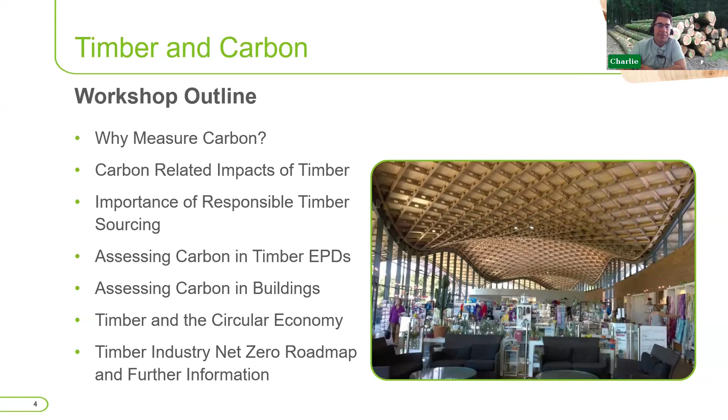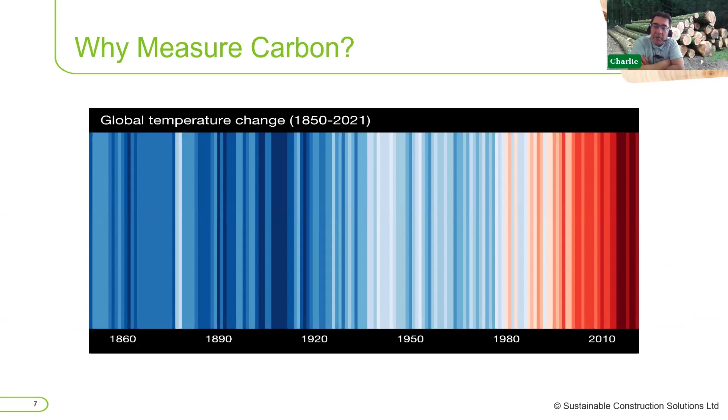So why do we need to measure carbon? I think hopefully we all agree we're in a climate emergency at the moment. Some of the hottest years on record have occurred in the last 10 years or so. And we're currently on course for a minimum 3 degree temperature rise by the end of the century. And considering that we set targets in Paris in 2015 to try and keep well below 2 degrees, preferably at 1.5 degrees compared with pre-industrial levels, we're not doing too well on that. And actually, last year we breached that 1.5 degrees Celsius average temperature.

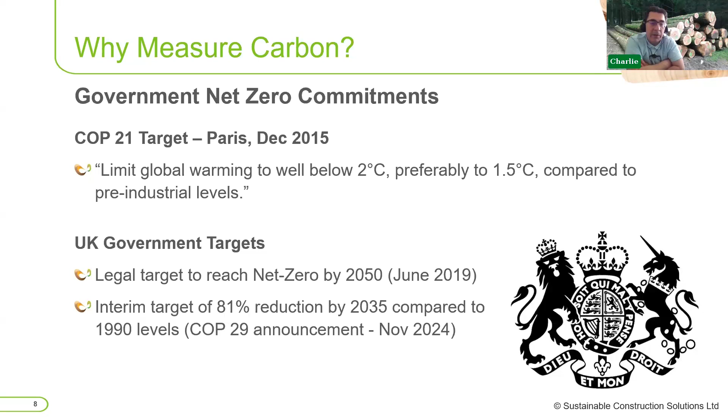Alongside that, so that's the international targets, and obviously we know there's lots of upheaval in the international world at the moment, but the UK government still has its net zero target of 2050, which was set in June 2019, and there's now an interim target which was announced at COP29 last November, where they're looking to make an 81% reduction by 2035 compared with the 1990 levels. So the UK is doing pretty well, and it shows that it can be done. And we can see big reductions in CO2 emissions if we do get the right policies in place.

A key document that was issued earlier on this month is the Timber in Construction Roadmap. The word from the minister there: this roadmap supports the government's ambitions for a circular economy and a sustainable low carbon future. And obviously they recognise that the built environment accounts for around 25% of the UK's carbon emissions. So by increasing the use of timber, which obviously sequesters carbon, we can significantly reduce these emissions to achieve their net zero goals by 2050 while stimulating the UK economy. So that's what the government is saying around it.

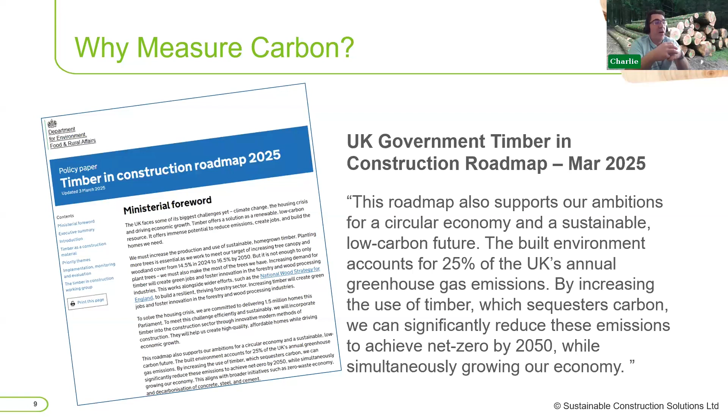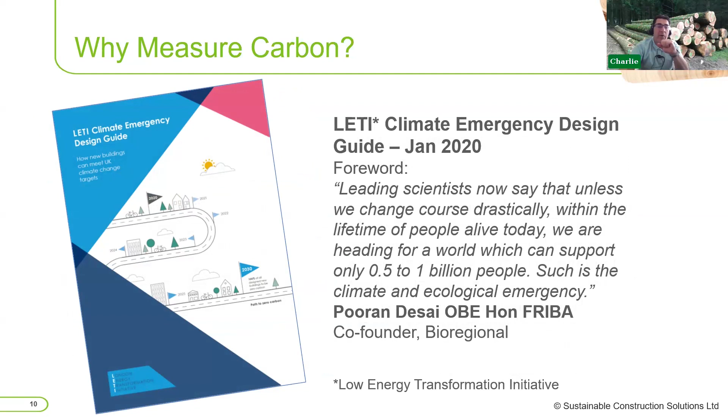But obviously, to be able to confirm that we're doing that, we need to be able to measure carbon as well. People like LETI have been pushing this for a long time. So their climate emergency design guide has targets in it on what we should be pushing for. And obviously the Climate Change Committee, one of their progress reports basically says we need to develop plans to rapidly scale up levels of wood used in construction and support the assessment and benchmarking of whole life carbon in buildings. So that's what the Climate Change Committee is recommending the government should do.

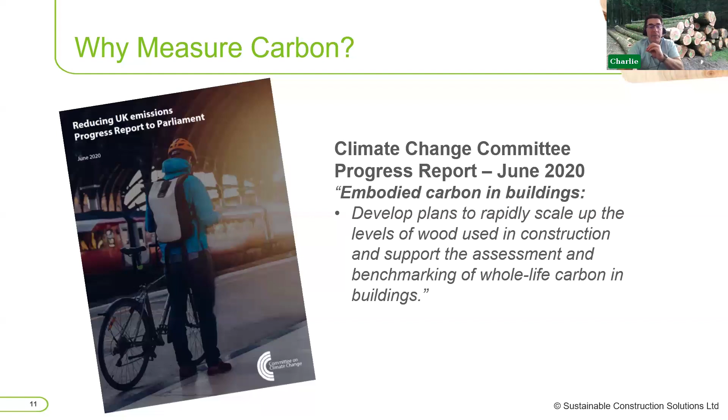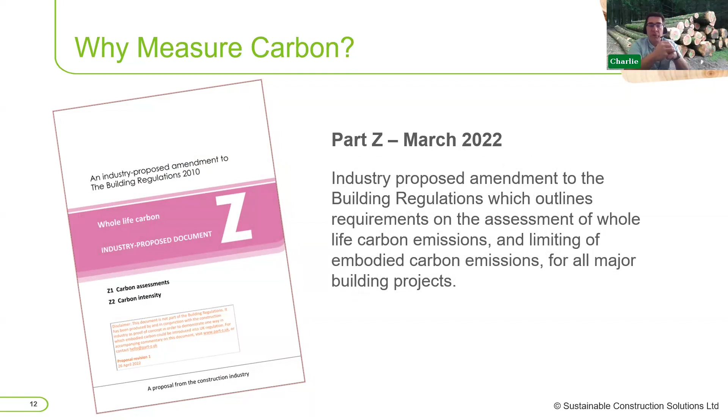The industry agrees, and the industry has proposed this Part Z amendment to the building regulations. This isn't actually a building regulation at the moment. This is a mock-up developed by the industry, which outlines how the requirements on assessment of whole life carbon emissions in buildings could work, along with limits on the embodied carbon based on amount of carbon per square metre of floor area. So everything is pushing towards us measuring carbon in buildings and construction going forward.

How does that impact on timber? Don't want to teach you to suck eggs, but going back to our old biology lessons back in high school, obviously trees take CO2 out of the atmosphere. They absorb the carbon and emit the oxygen back into the atmosphere.

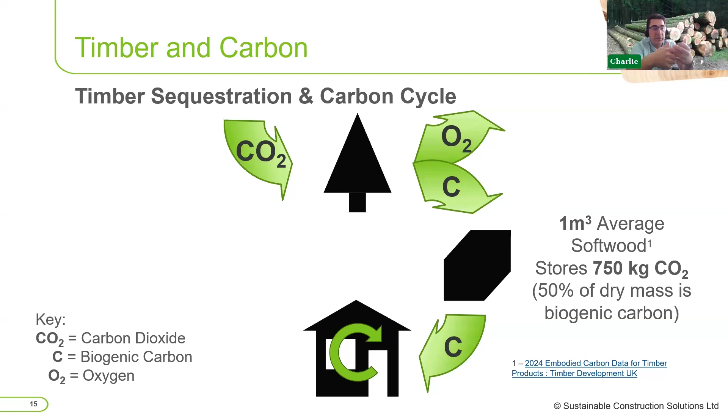But obviously that carbon as well, that's a physical carbon that stays locked up in that timber, no matter how many times that piece of timber is used or recycled. That carbon stays locked in the fibres of that timber. So as long as we can use that timber in construction for a long amount of time, recycle it, reuse it an infinite number of times, the only way it can be released back into the atmosphere is if it decomposes or we burn it.

And a lot of the waste timber we use is burnt, but obviously that's balancing the carbon emissions from when it first came out. So in effect, you get a carbon balance across the life cycle. But over that period in between, it could be a couple of 100 years, could be 300 years. If it's the door in Westminster Abbey, it's 1,000 years. That carbon is being stored.

However, going forward, it's likely we're going to have some form of carbon capture and storage. And then we can not emit that carbon when we burn it at the end of the day. So that becomes very much a carbon removal mechanism going forward.

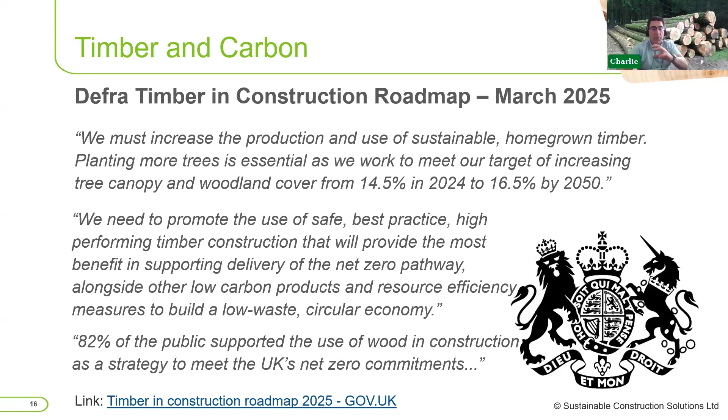So just looking at some more issues around timber, and this is some more stuff from the roadmap where the government is saying, look, it understands this, and we need to improve and increase the amount of homegrown timber that we're using, and we want to increase the canopy cover from 14.5% to 16.5% by 2050, and we also need to promote low carbon timber and support timber in construction going forward.

And the reason for that is obviously that it's not just the timber in construction that's storing carbon, it's the actual forests themselves. So this is from the Forest Europe report, shows that in Europe, we've got about 227 million hectares. It's around 35% of the total land area. And that is storing in the forests and the soils about 135 billion tons of CO2, with a net uptake currently estimated at around 570 million tonnes per year being taken out the atmosphere by those forests.

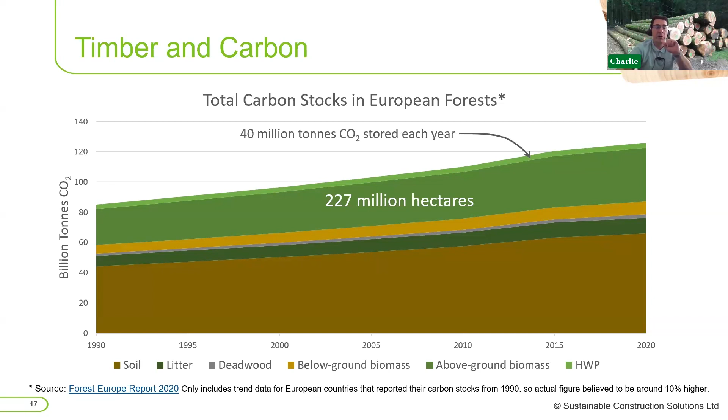So a lot of biomass being there, and 40 million tonnes of that being stored is actually in the built environment. So that's what we call harvested wood products, generally used in buildings and construction. If we look at that for the UK, we can see obviously we've got a lot lower forest cover in the UK. It's only about 13% overall.

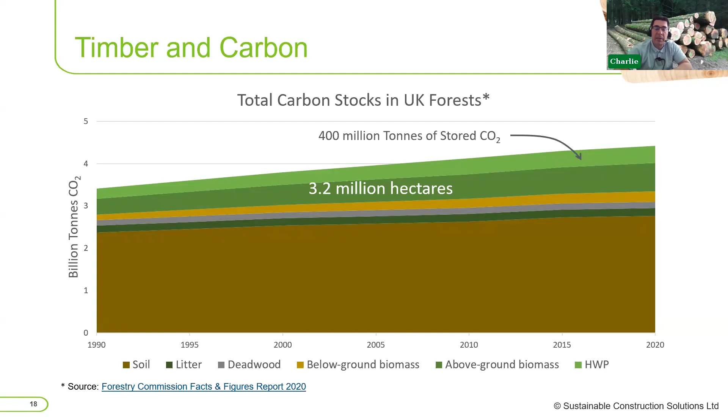If you look at that green line at the top, that's the harvested wood products. Because we're importing a lot of timber into the UK, the harvested wood products makes up a lot larger percentage of the stored carbon in the UK. So it's about 4.2 billion tonnes being stored overall in woodlands, at around 20 million tonnes per year take up, with a significant around 400 million tonnes being stored in those harvested wood products.

So as far as how we measure that carbon, there's two key documents that we need to look at for construction products. EN 15804 is the core rules for product category rules for construction products, and that's really around the environmental product declarations that are produced for individual products. And then you've got BS EN 15978, which is the sustainability of construction works, the assessment of environmental performance of the building. So that's taking the information from the EPD for the product and then multiplying that up for the works in the building.

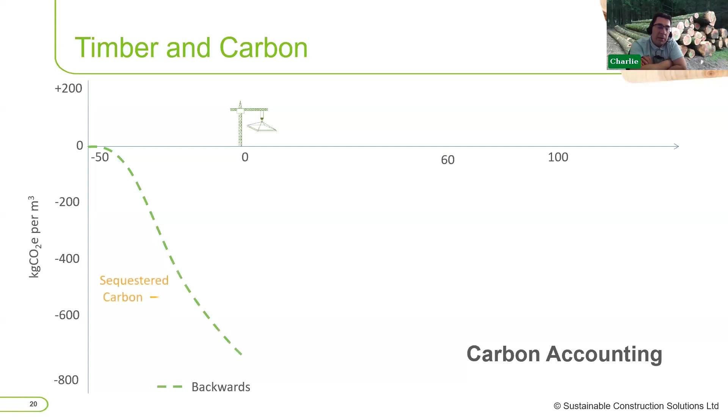The standard itself is quite basic. So what the RICS have done is produce their whole life carbon standard, so whole life carbon assessment of the built environment. That's now in its second edition, which basically gives a lot more guidance on how you can do that for a building. And in effect, the way it works, if we take this graph for timber accounting, it takes what we call the backward approach, and to try and explain how this works.

So we've obviously got our timber growing in the forest 50 years before it's harvested and used as timber. So over that time, it's taking carbon out of the atmosphere. So that's the 750 kilograms of CO2 that we talked about. So that's the line coming down here. Obviously, when it's felled and processed, there's a carbon impact of that. But overall, there's a net negative figure of carbon held out of the atmosphere.

There is another school of thought which talks about using the upfront carbon, which does cause a few issues because there is a missing carbon gap. So it's not something we promote, taking the upfront carbon and discounting it over a number of years. It just doesn't really work.

And the standards agree with us, actually, because if you look at the way the standards work, they do take that up front. So when you do your assessment for your building, you take the biogenic carbon into account when you're doing a whole life carbon assessment at the point of construction. Obviously, there's an upfront impact there.

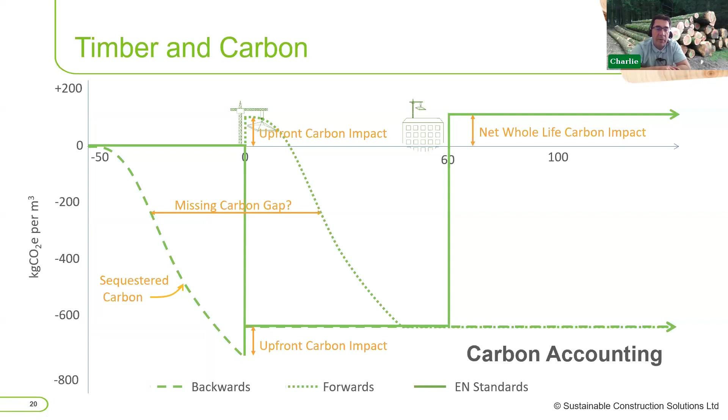What the standards do say, though, is you must work out that whole life carbon assessment over a 60-year period. So you end up having to add back in that biogenic carbon after a nominal 60-year period. Obviously, the building may stand for a lot longer than that, but you have to account for it over a nominal 60-year period. So you end up with a net positive whole life carbon impact figure, which is the true impact of the processing of the timber, which is fine.

But in that intervening period, obviously you're storing that carbon out of the atmosphere. So it can't actually do any damage to the planet at that time. And obviously, if that building stays up, that carbon is stored for a lot longer than that. It's not just 60 years. If you can keep that building in place, that carbon is stored for a lot longer.

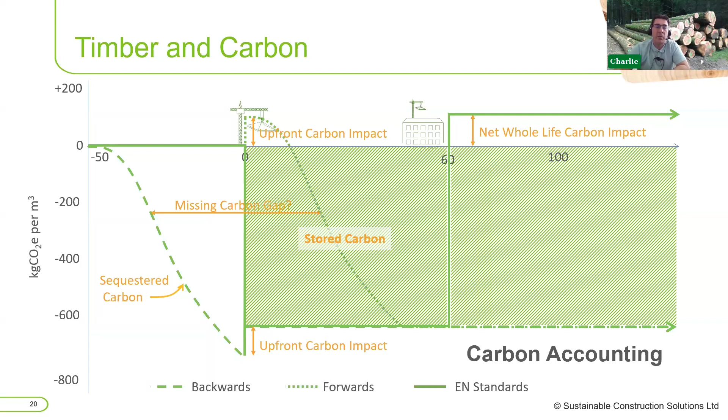So why is it important that we use responsibly sourced timber within these carbon assessments? Well, the standard basically says why. It says, in the 15804 definition of sustainably managed forests, you can only include timber in the upfront assessment, in the A1 of the assessment, if you're obtaining timber from sustainably managed forests.

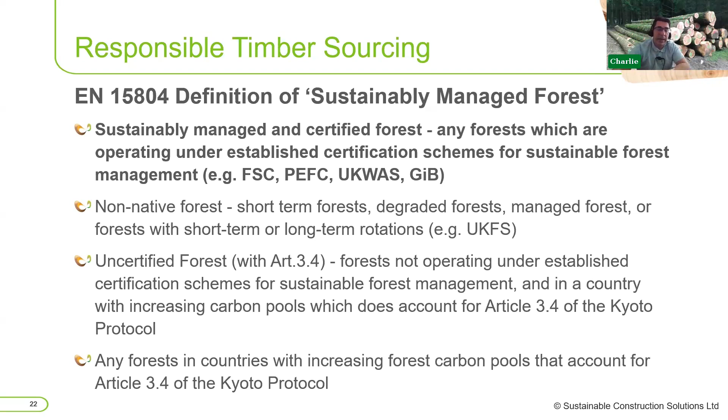So, for example, sustainably managed and certified forests, any forests operating under an established certification scheme for sustainable forest management, such as PEFC, obviously here today, but also FSC, UK Woodland Assurance Standard, Grown in Britain, for example, would all come under those definitions. You've then got some other options of possible forests which might be able to be included, but there's a lot more work to do to demonstrate that.

And obviously, the reason for that is we are seeing a lot of deforestation still around the world. It's better than it was back in the 1990s. If you look at that graph there from the UN Food and Agriculture Organization, at one time we were losing about 7.8 million hectares a year. It's now slowed, but we're still losing 4.7 million hectares of net forest a year from the world's surface. So we do need to reverse that trend very soon, really.

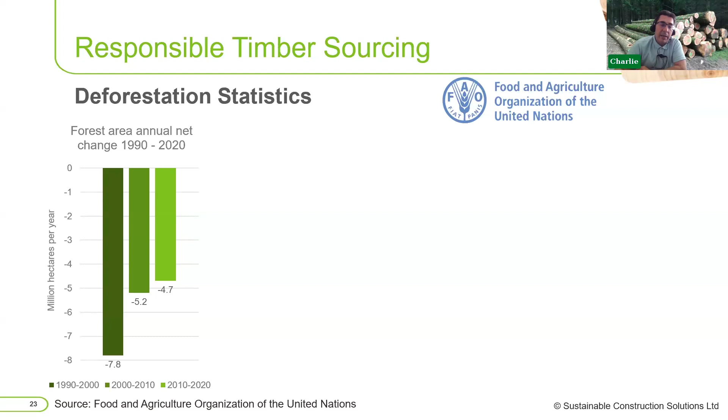So based on that, what are we actually buying in the UK? What timber do we buy? The latest information from the Forestry Commission Statistics Report that comes out in September each year, so this one's from September 2024, shows the data for the previous year, and TDUK import data as well shows that the vast majority of the wood we use is softwood based. That's coming from generally fairly local areas, mostly from Europe, Scandinavia in particular.

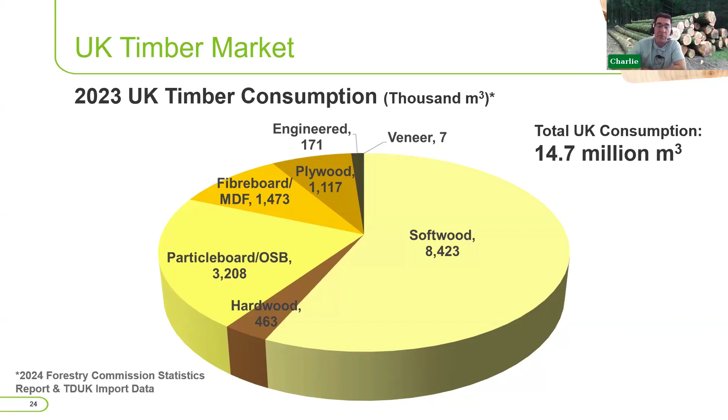Launch this one. How much of the UK consumption, that 14.7 million cubic meters, do you think is sourced from the UK? So most of you think around 20%, which, to be fair, if you were talking about structural timber, that's not far off actually. We estimate that around 80% of structural timber is sourced from overseas, and only 20% from the UK. But actually, when you take into account all the other timber uses such as fencing and pallets, it's actually around 37 to 39%, depending on the year.

So almost 2/5 of the timber we use in the UK is actually homegrown, which some people are surprised by. So that's where we are with that. If I do a little breakdown here of where stuff does come from, you'll see that UK amount there, about 5.5 million cubic meters based on the 2023 results. The vast majority of the remainder coming in from the EU, places like Scandinavia mainly, and in particular Sweden, about half of our softwood imports coming from Sweden.

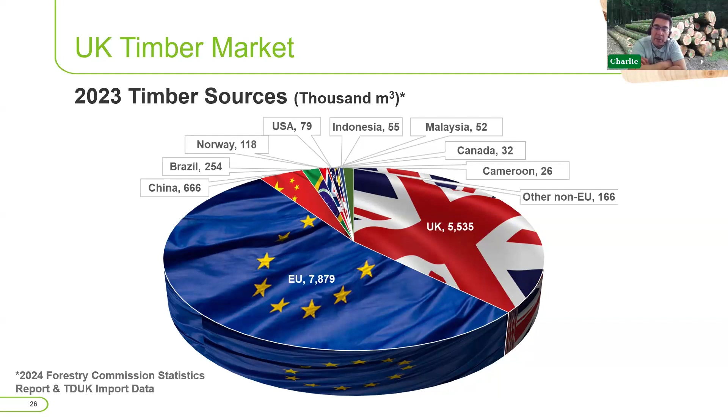But you have then got some imports coming in from some of those higher risk nations, so China, Brazil, Indonesia, Malaysia, Cameroon, which would be classed as higher risk in a lot of cases, particularly Brazil, because of the deforestation there. So when we're sourcing from those countries, we absolutely need to make sure that it's responsibly sourced timber coming in, preferably PEFC.

And that is very much like a crop. It's a 35, 40-year crop, but it is a crop in the same way as we plant wheat for our food and bread. We plant trees for our construction timber. It's just a much longer life cycle, but that's how we've got to think of it, as a crop.

Slightly different methods for hardwood. This is a typical picture from a Malaysian forest, where we'd do selective felling, where we only take out the amount of timber that forest can regenerate in a period. So in any one year, a forest might put on 100 cubic meters of timber. So in that year, in that area of forest, we can only take out 100 cubic meters of timber. So you maintain that balance in the forest.

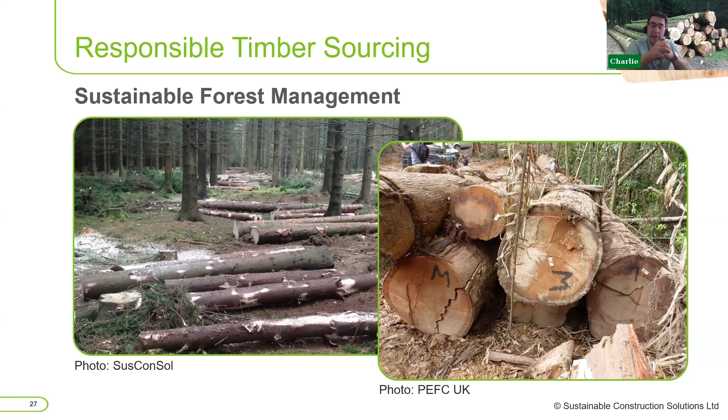That's backed up by the government's responsible timber sourcing policy, the TPP, timber procurement policy. That requires that only timber and wood-derived products originating from independently verifiable, legal and sustainable sources, which can include FLEGT partner products, will be demanded for use on the government estate.

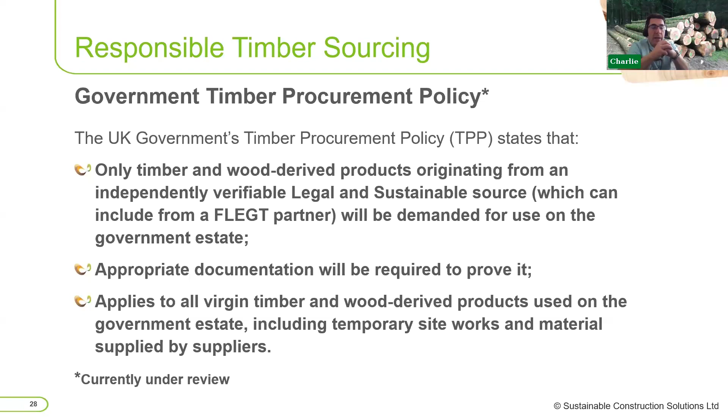They will demand appropriate documentation to prove that, and it applies to all virgin timber and wood-derived products used on the government estate, including temporary site works, hoardings, formwork, protection, etc., and all the materials supplied by suppliers and subcontractors, not just the principal contractor.

There are two ways of demonstrating that. There's what we call category A evidence, which is independent forest certification schemes, and the two that are noted in the scheme at the moment are PEFC, obviously, and FSC. It's likely that Grown in Britain will get added to that in the next iteration. They've been talking about doing an update for the last 5 years, but we do feel that that's going to be very close now.

Grown in Britain demonstrate that timbers come from a UK forestry standard source, which is category B evidence at the moment. But you've also got your FLEGT stuff, which sort of sits in between A and B, but I've stuck it in B there for now. And if you can't demonstrate that, then you have to comply with the framework for evaluating category B evidence, which is quite an onerous task. You do not want to be doing that if you can help it, because that is a hell of a lot of work. So best to go for one of those certification schemes.

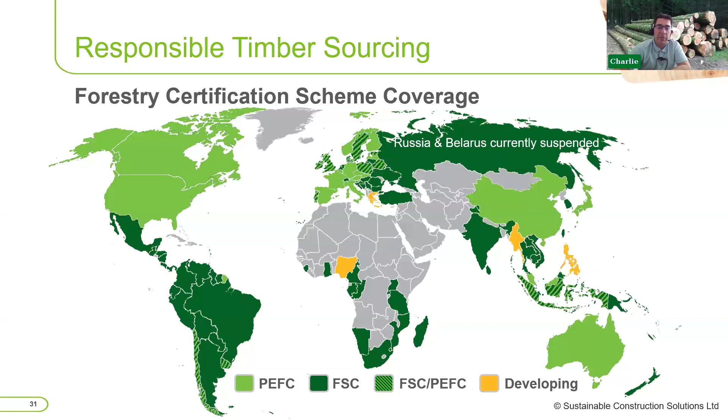And when we said that most of our timber is coming from Europe and Scandinavia, it makes sense that we should make sure that we allow that PEFC timber, with FSC very much dominating the higher risk areas. So places like Brazil, Sub-Saharan Africa, obviously Russia and Belarus, which are currently suspended; we can't get any timber from there at the moment. Also parts of the Far East. So just bear in mind where you're getting your timber from; you need to include all of those schemes to get the best opportunity to get certified timber.

So assessing carbon in timber EPDs. How do we assess the carbon in an EPD? We'll spend the next half an hour going through that. There's a number of stages within an EPD. We've got the raw material extraction, transporting that from the raw material site to the manufacturing site, and the manufacturing process itself. That's termed A1, A2, and A3, what we call the product stage.

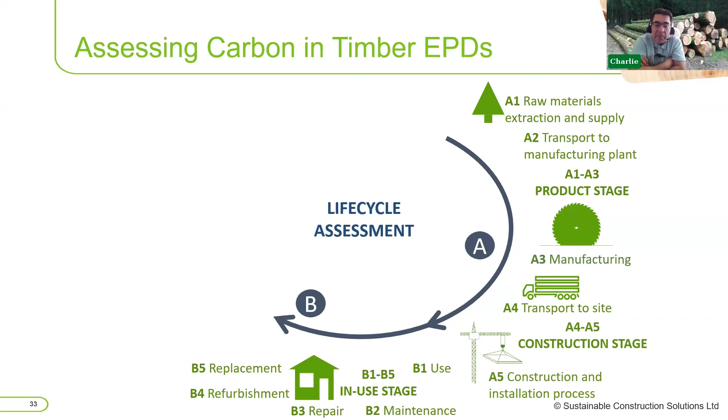We then have the construction stage, which is transporting that material to the site of use and putting it in place on the construction site. We then have the in-use phase, B1 to 5, which is use, maintenance, repair, refurbishment, and replacement. There's the operational carbon phase, which is part of the use phase in effect, where we talk about operational energy and water, so B6 and B7. And then we have our end of life stages, so deconstruction or demolition, transportation off-site, and then any processing and possibly disposal if it is going into landfill. So that's our main stages.

We also have our D stage, which doesn't form part of the calculation, but explains the benefits beyond the life cycle, so the benefits of recycling or using as biomass or whatever it may be. Now, when we talk about embodied carbon, we're talking about everything but the operational carbon. So A1 to 5, B1 to 5, and C1 to 4 is our embodied carbon element. The operational carbon is B6 and 7. All those added together, embodied and operational, is a whole life carbon assessment, but you might sometimes hear the term upfront carbon as well.

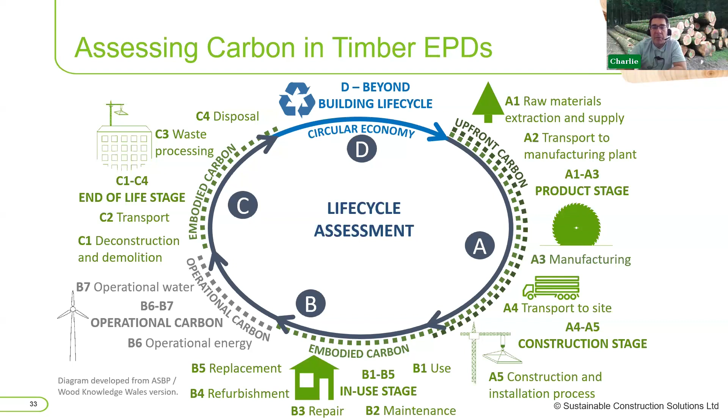And that's where we do an assessment based on just up to practical completion, so A1 to 5 only. So a few terms there that you might want to look at. If you want to read up on those, there is a good glossary on the TDUK website if you want to read up what those terms actually mean and remind yourself.

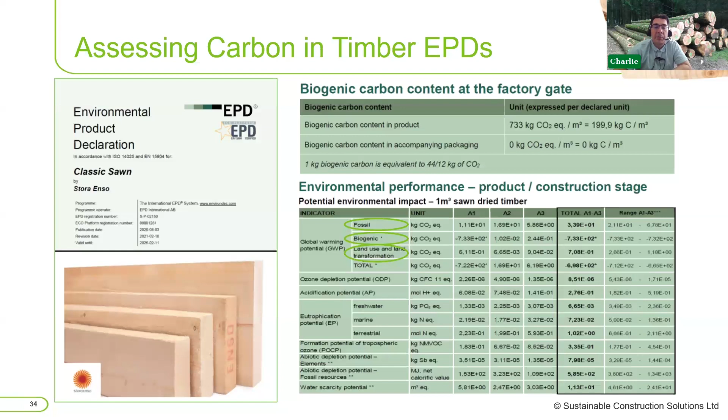So just to give you a few ideas on the sort of figures that you get from these sorts of EPDs. A1 is the extraction of the raw material, excluding the biogenic carbon in this case. For the Stora Enso EPD, it's around 11 kilograms of carbon, so very little carbon emitted during that extraction phase. That's things like planting and growing the trees and then harvesting them at the end. Transport is probably the biggest emission in the timber supply chain. So transporting that timber from the forest into the sawmill is gonna be the key impact in most cases.

You've got about 17 kilograms of carbon there, and then the actual manufacturing stage, particularly if they're using things like biomass energy for their kiln drying. When they dry the timber, they use the kilns and have to heat them up. If they're using biomass, that's classed as carbon neutral. And some of the Swedish mills are using hydroelectricity and stuff like that, so you can really get those manufacturing emissions quite low. So the actual manufacturing of the timber is a very low carbon resource, and upfront carbon there is quite low.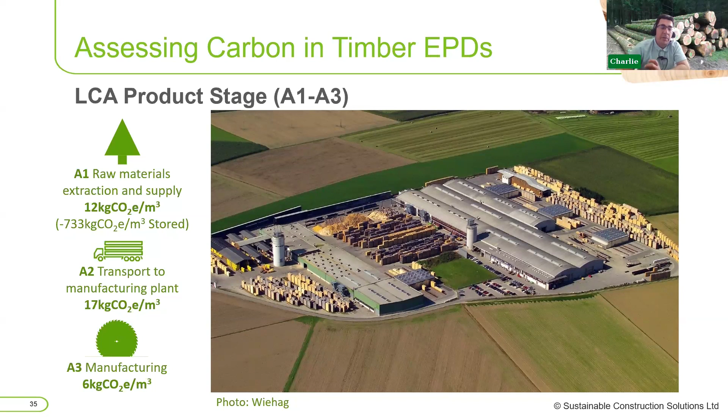You've then got to get that material to the site. So the A4 emissions on this particular example might be around 38 kilograms of CO2, because you're shipping it from Sweden into the UK. So you've got that shipping emission that you need to take into account there. And then you've got use on site, which there's not too much data on at the moment. It's been estimated in this EPD around 15 kilograms of CO2e per cubic meter.

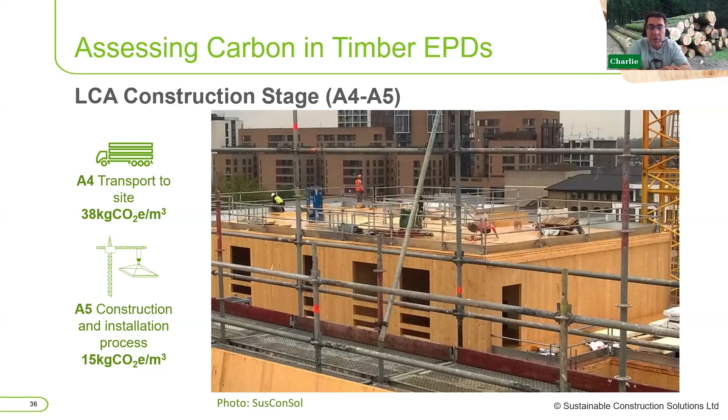But that should be a lot lower than other materials, because you can use things like smaller cranes, for example. You wouldn't need such a big, heavy crane to lift the materials into place, because timber has a high strength to weight ratio. So you've got a much lighter product that's going to do the same job as a heavier product, say concrete or steel. So you can have a lot less plant or smaller plant on site to do that job.

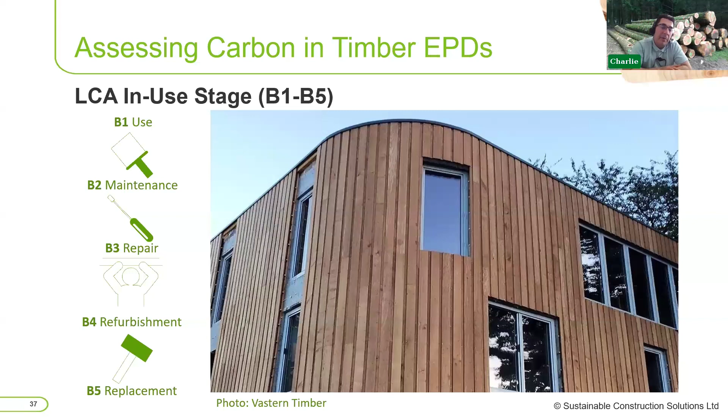In use phases, timber really doesn't have any impacts if you specify it right, for example the timber frame, that's going to be left in place for the whole of the project. You might need to think about external cladding elements to make sure they can last the life cycle, to minimise the impact of maintenance and repair or replacement in certain cases. But generally, timber can last the length of the 60-year life cycle that we talk about.

We've then got the end of life, which again is quite low, because the timber doesn't usually travel far from the site of use to the place of treatment. So it's generally quite low mileage emissions there.

So you've got a bit under deconstruction. The transport again is the main emission, and then you've got some waste processing. And like I say, in most cases that will be chipped into one of the four here. It'll be either reused, maybe not so much at the moment, but that's something we need to look at.

Quite a bit is recycled, it might go into biomass, and we've got some figures later on which show you the breakdown, or it goes to landfill. And the EPD will probably give you a figure for each one of these in some cases. So the Stora Enso one does actually give this broken down for each type, for each impact.

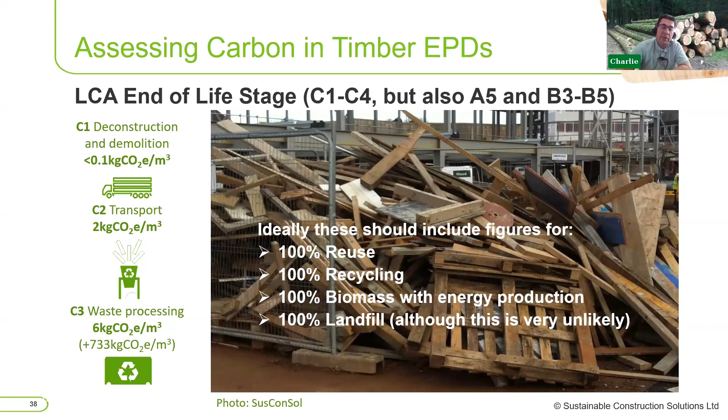Beyond the life cycle assessment, we need to look at the benefits and or burdens accruing from repurposing elements from discarded built environment assets. So things like, for example, reuse of engineered elements or the use of recycled wood chip for particleboard manufacture obviously avoids the production of new wood chip and new softwood timber. So if we're using that, that reduces the impact from that original harvesting, for example. So that's what we're talking about in Module D.

So that's why we need to look at how we can, in most cases with timber products, cascade the reuse. So we've got the timber coming in at the top. We've got our mass timber that might be able to be cut down and reused as reclaimed timber. Timber elements such as glulam beams might be able to get reused in other smaller buildings. We can then chip that material into panel boards, maybe chip it again,

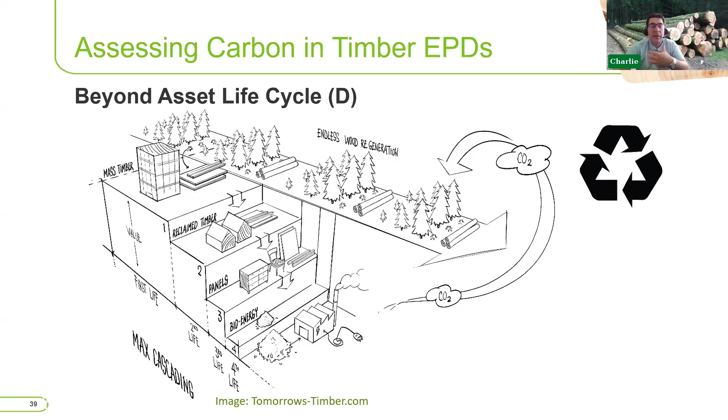and it might go into things like insulation. And then, at the very end of its life, we can burn it and extract the energy from that product to make electricity. And then obviously the CO2 from that process gets reabsorbed back into the trees that are growing.

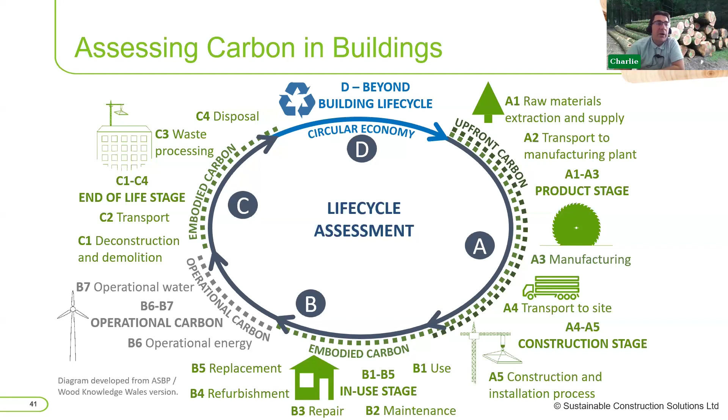So assessing carbon in buildings is very similar. So that's the EPDs, but the building is exactly the same graph or table here. We've got the raw materials coming in, we've got the on-site construction emissions, the maintenance, the operational, and the end of life stage. So exactly the same sections of that life cycle assessment for buildings.

Just a quick question. So when assessing the embodied carbon of an asset, when can you include the sequestered carbon within the timber product? Share the results. Most of you got that right. So yeah, when carrying out a whole life carbon assessment, i.e. A1 to 5, B1 to 7, C1 to 4, and D, and all the timber is sourced from a verifiable, sustainable source. So absolutely correct there. And that sort of leads back to what we were saying before around the sustainable timber element.

So this is how you treat the sequestered carbon in timber products. So whole life carbon assessments, as we said, A1 to 5, B1 to 7, C1 to 4 and D. You can include that negative biogenic carbon in A1. So for example, the average for softwood, you could include a figure of minus 750 in there for the carbon, and obviously the impact of the timber production itself. And then you add back in the transferred carbon at the end of life in C3. So you add back in that biogenic carbon.

It's usually in C3 because it's going to go either for recycling into things like panel boards or into energy from waste. So it's transferred out of the system at that time. It's not emitted to atmosphere at that point. It's transferred out of the system into another product. And that other product would be, say, panel boards, animal bedding might be another one, or biomass energy fuel. And it's the biomass energy fuel that then takes the impact for burning it.

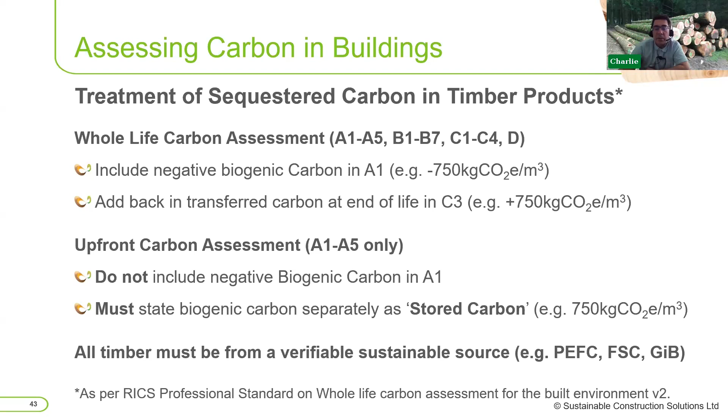If you want to look at some of the data, because obviously when you're doing your upfront assessment, you might not know exactly what timber you're using at the time when you're doing your initial assessments, we'll point you in the direction of the TDUK embodied carbon data. So if you go to the TDUK website, you'd be able to click on the embodied carbon data for timber products.

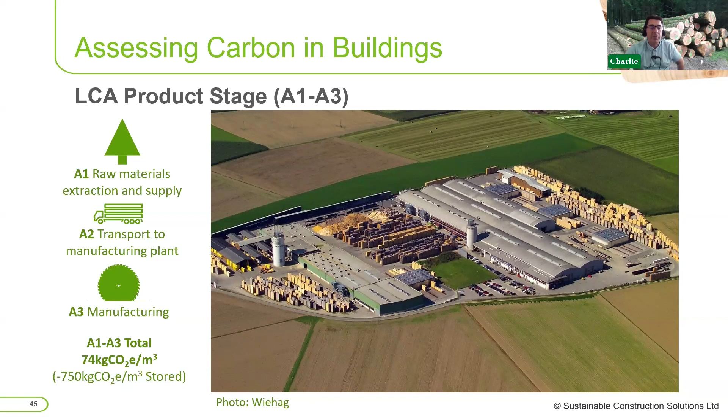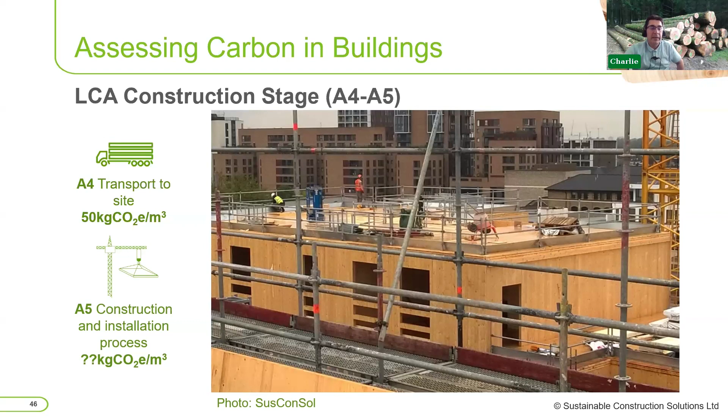Basically, I say product stage, you include exactly the same stuff. So from A1 to A3, if you include it, just doing an upfront assessment, you're probably looking at around 74 kilograms of CO2, if not less, on some of the other timbers now. Transport to site is about 40 or 50 kilograms in a lot of cases. Construction site emissions, you'll have to estimate, and that'll have to be based on data that you're looking at for the site itself, but something you have to calculate from the RICS table there.

Maintenance, obviously, if you include materials that are going to last a long time and last for 60 years, there won't generally be any sort of replacement or refurbishment costs. You might have some maintenance if you've got a coated timber product, so whether it's painted or varnished or oiled or something, you might have to do some maintenance to it. It depends on the type of timber. This one here is actually a Brimstone product. It's a thermally modified timber. You just leave that. You wouldn't need to treat that at all, and that would last for 60 years, for example.

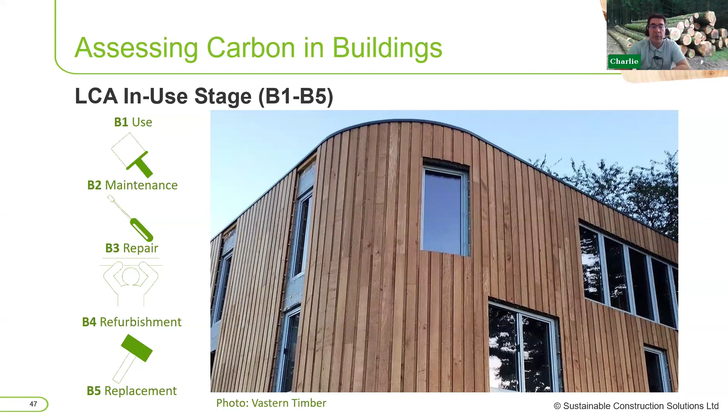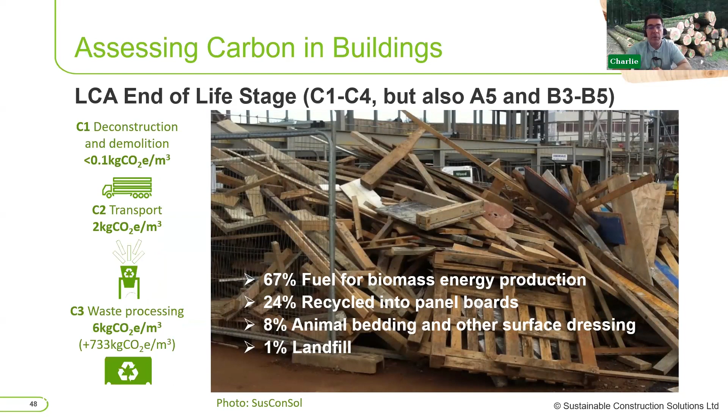And then for your end of life phase, overall, you could include these figures for your calculations. So around 67% of timber ends up in fuel for biomass, around 24% in recycled panel boards, 8% in animal bedding, and less than 1% goes into landfill. Okay, so if you wanted to include a split, that could be your split overall for timber products. If you want to go in a bit more detail, there is a table in the TDUK papers and the RICS professional standard, which gives you a better breakdown based on the type of timber that you're using, whether it's engineered or whatever it might be.

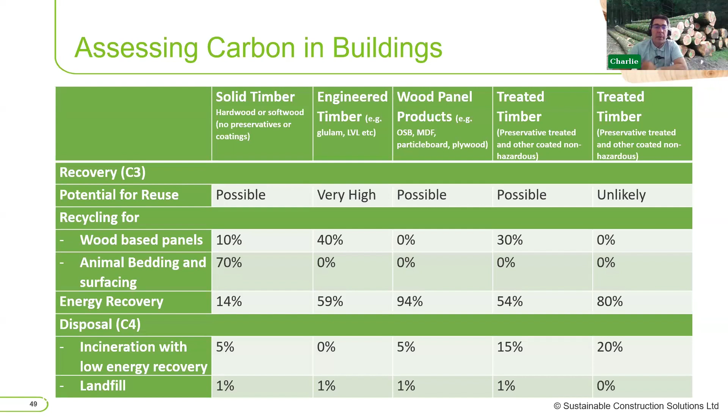Okay. And obviously, one of the key bits that we need to look at when we're looking at reducing embodied carbon is timber and the circular economy. I will whiz through some of this because I know we've got some questions that have come in, and I will get to those before the end. But timber and the circular economy. So, circular economy, we do another course on this, so I won't spend too much time on this. I will rattle through this.

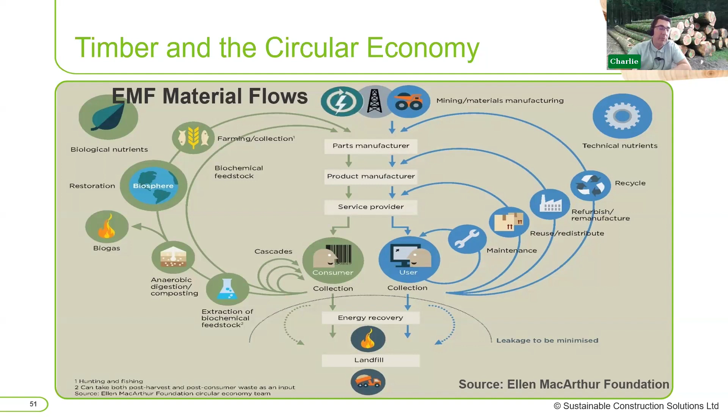But basically, looking to keep the timber in use at its highest level. And timber does sort of fall, if you look at the Ellen MacArthur Foundation, between technical nutrients and biological nutrients. We want to try and keep it in use, maintain it, reuse, redistribute, refurbish, remanufacture it, and recycle it at the end of life. But then it'll probably go into the biogenic cycle where it goes back into the biosphere at some point. But what we do need to try and do is minimize that energy recovery element, because once it goes to energy recovery, we've lost that product and have to then grow a new tree, basically. Whereas if we can keep reusing that existing timber fibre, it's a much better way of doing it.

So one of the options I think we need to do is we need to obviously design out those fossil fuels. We need to move to more renewable energy for our production processes, and that might include some biomass for timber, for example, for the heat that we mentioned. We need to look at our business models and whether we actually carry on selling product or whether we look at lease or service contracts. When we install the product and manufacture, we need to make sure we're recycling all the waste from that process into other products. And once we've installed the product and it's being used, we need to make sure it's maintained in place, so it keeps it there for as long as possible.

And when it does get to the end of its life, we deconstruct it, disassemble it into its component parts as required, and try and reuse those component parts rather than first send them for refurbishment, remanufacture as a second option. And as a last resort, we should be putting them in for recycling, preferably closed loop, but if it is open loop, we need to make sure there is a defined use for that recyclate going forward.

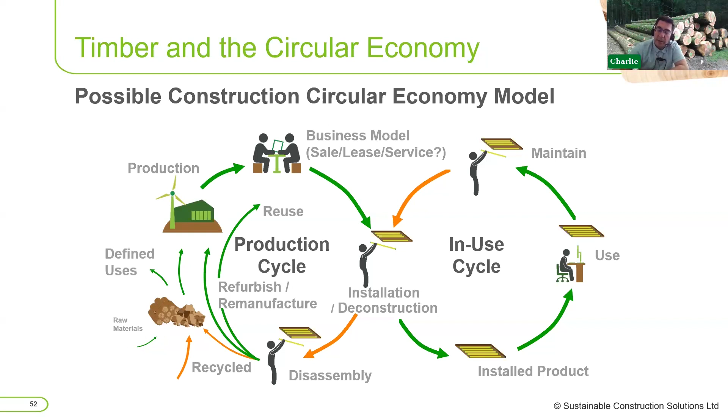And actually, timber is pretty good at this. This is a diagram that was produced back in 2009 by CEI-Bois, which is the European Timber Industry Federation. And I've adapted this and added some more arrows to it. Basically, this shows that actually timber is quite circular at the moment. We do use a lot of the product.

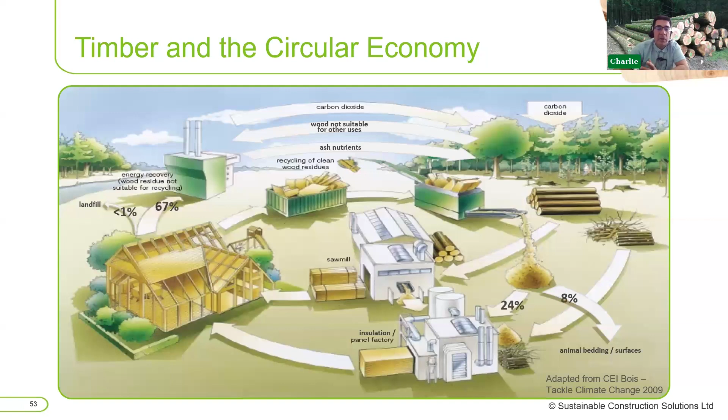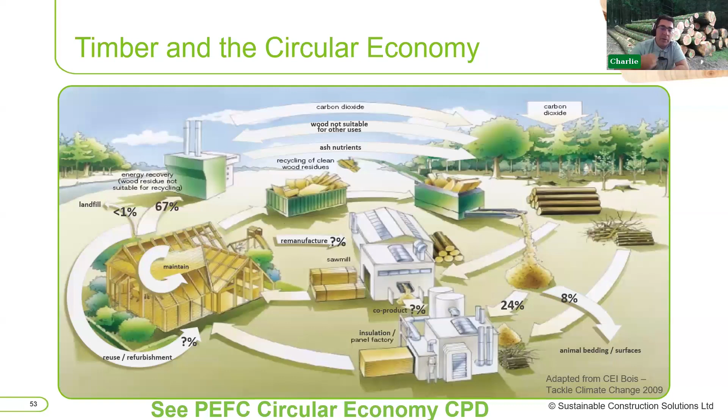Unfortunately, quite a bit at the moment is going into that biomass element. About 67% going into biomass. We're not too sure what's being reused and refurbished because there's no data for that. But we've got that 24% going into panel boards and 8% in the animal bedding there. So it's quite a circular process.

So designing for reduced carbon, including those circular economy principles. First thing we need to think about is, do we actually need a new building? We need to assess the embodied carbon early to maximise the reduction opportunities. We need to optimise the building form and layout and simplify the design. Incorporate circular economy thinking to ensure maximum reuse. Review the embodied carbon of different structural solutions.

So do we do timber? Do we do steel? Do we do concrete? Compare whole life carbon of the building servicing options as well, because the services can have quite a bit of impact. Consider the benefits of carbon storage within the building. So if everything's equal, is our building storing more carbon than an alternative if we use more timber? Focus on those hotspots and make sure we're reducing waste and ensure the maintenance is as simple as possible.

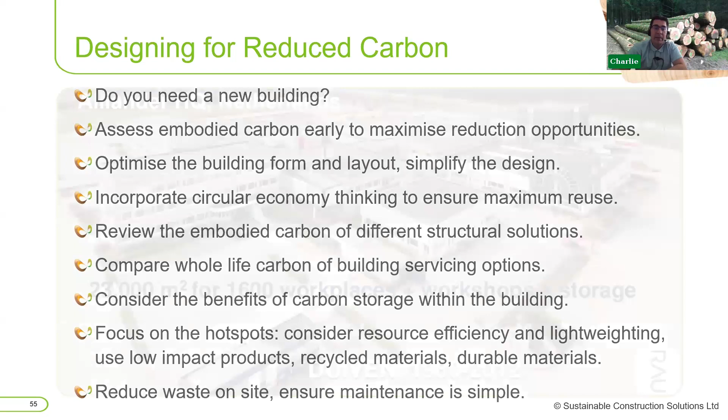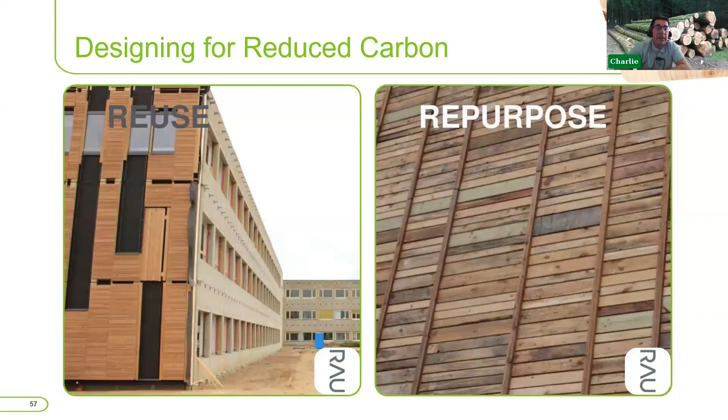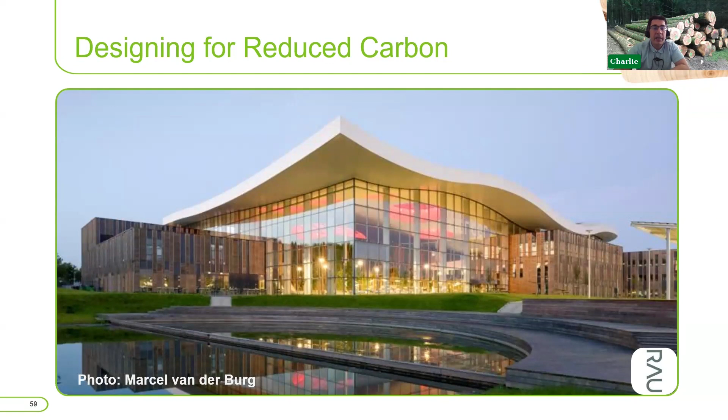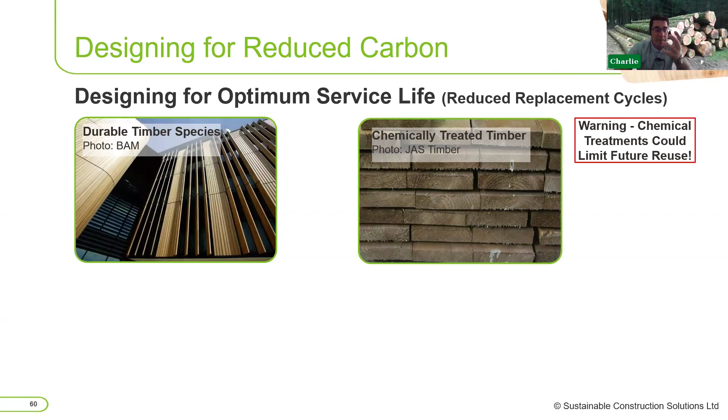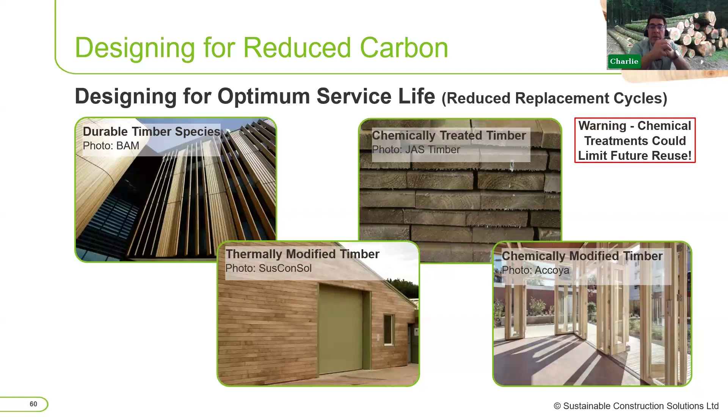We can optimise design for optimal service life. So whether we use durable timber species or chemically treated timbers, for example, for our structure, just be aware that chemical treatments could limit that future reuse. So only use them where we need to use them. Things like thermally modified timbers or chemically modified, so things like Accoya, Kebony, which use alcohol or vinegar to, in effect, pickle the timber to make it last longer. So these options might help you increase the life of the timber products.

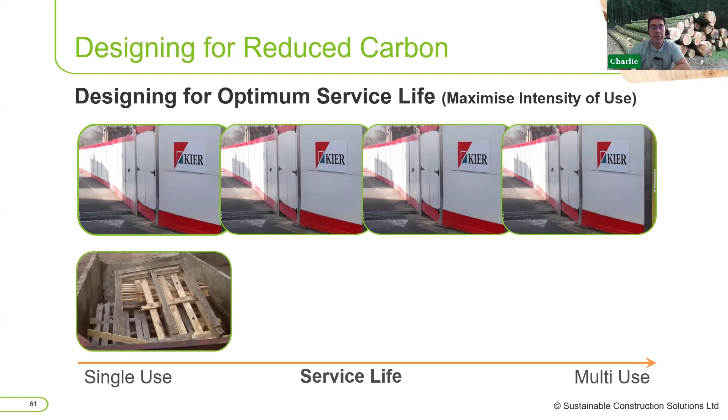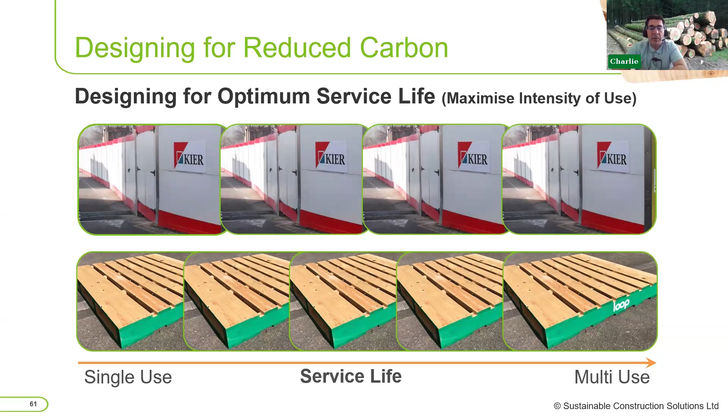Pallets is another one. 20 million single-use pallets are used in the UK each year. That's now being changed. The Pallet Loop launched in the UK last year, and they're now supplying around 2 million, about 10% of the pallets in the UK market, to construction companies. So a massive change there, and that's a reusable solution which can cut carbon if everything goes well and they get a high return rate, around 80%. That will cut carbon emissions in the industry associated with pallet transport by probably around 40%.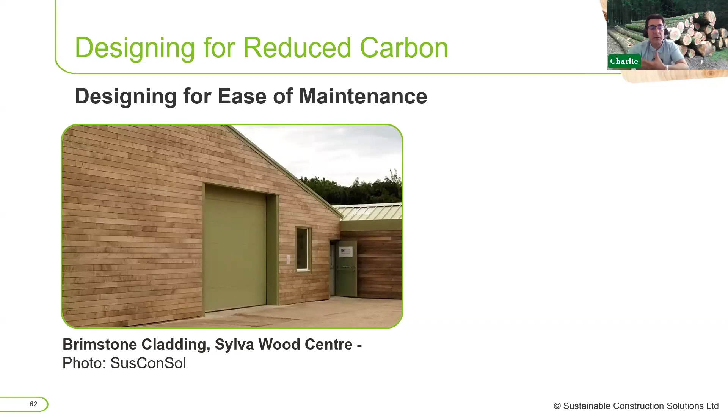Design for ease of maintenance. Make sure we can get to anywhere in the building, or use products and timber products that don't need any maintenance. For something like this Brimstone, for example, if you leave that to weather, it weathers to this silver grey finish here. That's quite all right. There's no degradation of the timber in that situation.

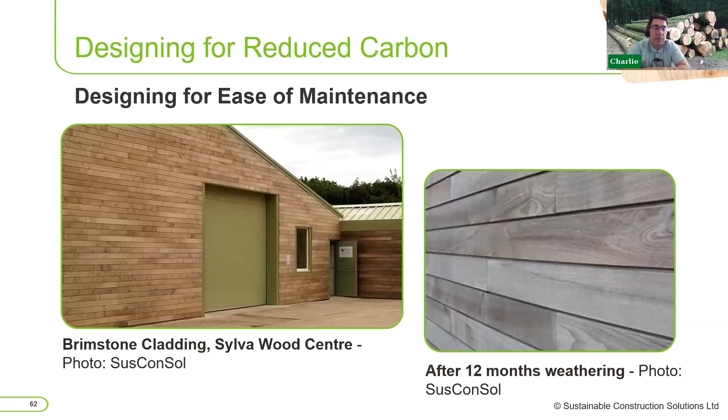You can see there that's after about 12 months. There's no movement in that timber anyway, as well. Very low movement in the thermally modified and chemically modified products there.

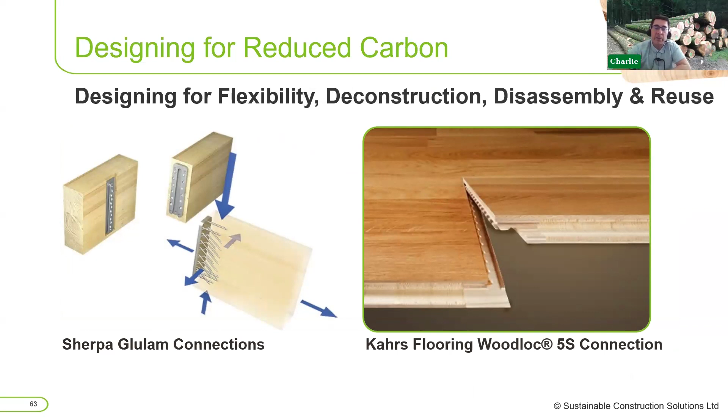We need to be looking at flexibility, deconstruction, and disassembly. So things like reusable connections for structural timbers or even timber flooring. This is a system which you can dismantle and take up and reposition elsewhere, and you can actually sand that down into the new finish.

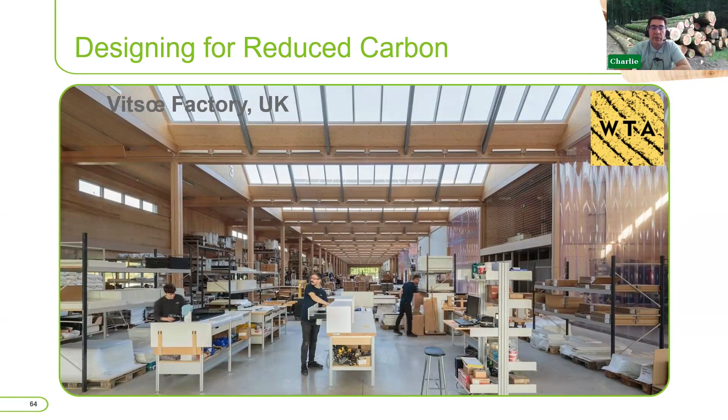Or make the buildings more flexible themselves. It's the Vitsoe factory, and it's designed to be a flexible space. So walls and units and things like that can be moved around in lots of different configurations. Or make the building totally dismountable. This is the ABBA Arena.

If you've been to the ABBA show in London, that whole building is made up of about 1,600 panels that will all fit in a shipping container. So they can all go into shipping containers and be shipped anywhere in the world, and that whole building reconstructed.

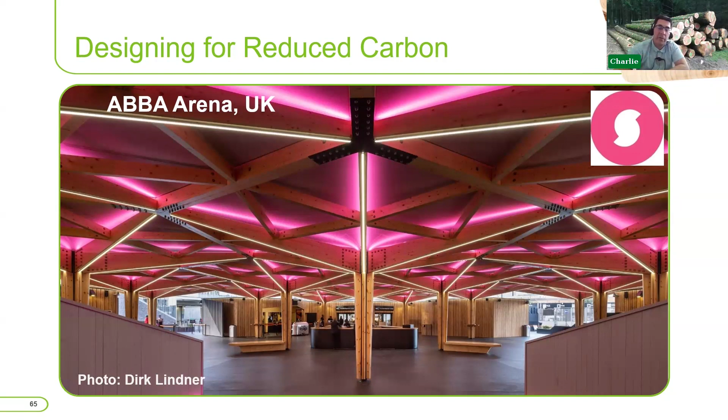So the timber industry, as well, is doing a lot of work. The timber industry has produced its net zero roadmap. That was published in January 2023 and shows the flows of different materials in the timber industry, quite a bit of it being biomass, which was excluded from the roadmap because this is the stuff coming in and being burnt in places like Drax, for example.

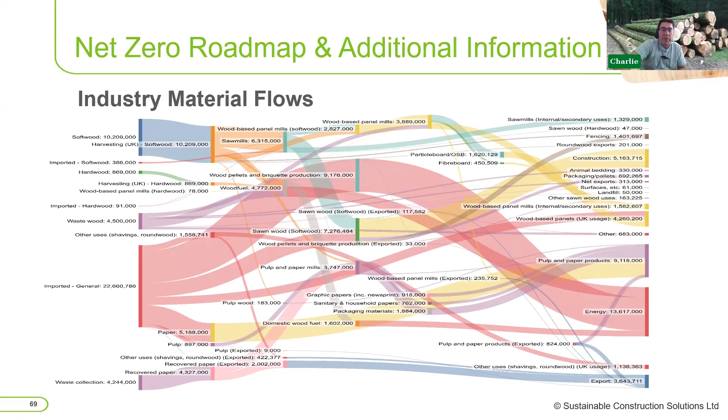The key bit we're focused on is this element here, which is the timber supply and the waste coming out of the timber industry and how we can reduce the emissions associated with that. It is quite circular, as mentioned earlier on, but the key emission there you can see is the transport emissions and obviously emissions associated with imported timber. Some of that is obviously the processing and things like that, and the kiln drying in other countries.

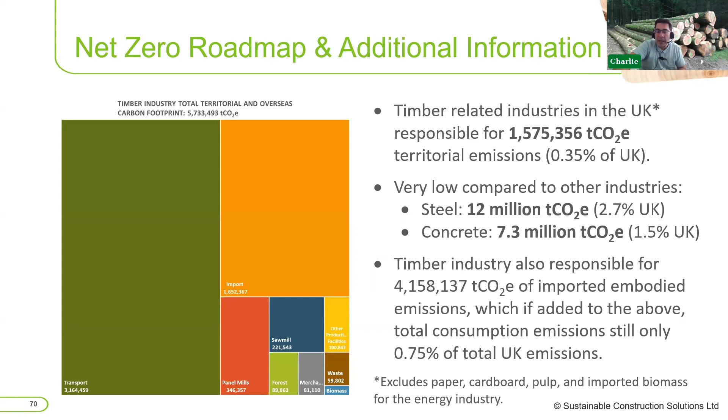So the target is to reduce that from around 5.5 million tons of emissions down to around 10% of that by 2050 is what we're aiming for, with the majority of that remaining carbon emission being from the imports of timber. So it's really focusing on making sure we can get the UK emissions down to near zero, so that anything coming in from overseas that may have a carbon emission associated, we can try and reduce that further.

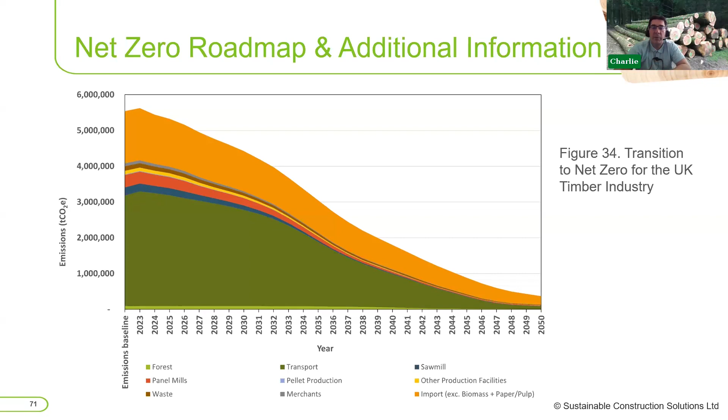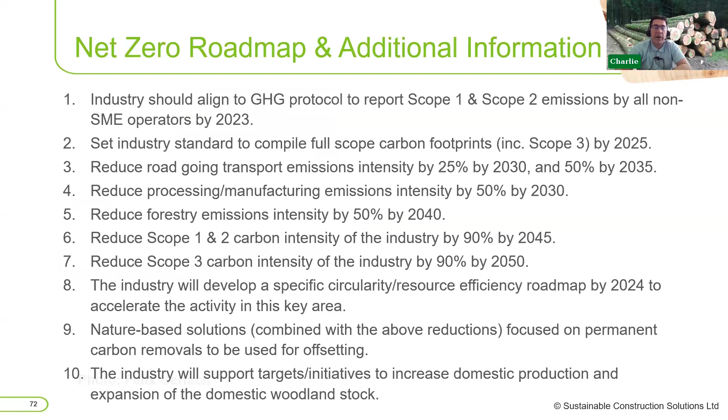A number of key bits. I won't go through this; they are all in the roadmap. But it's basically reducing emissions across lots of different areas, and part of that is obviously trying to make sure that we measure our embodied emissions in the products that we use, and that's about how we assess carbon-related impacts and benefits of timber and construction products, and also the timber and embodied carbon paper. So a couple of these papers explain how we measure that carbon and how we can then use that information and the information from reducing our emissions in the supply chain to reduce the carbon in that timber product.

So we've got about 5 minutes: call to action. Hopefully you now have a better understanding of timber and carbon and how we can reduce whole life carbon emissions for your projects. Key actions I think we need to look at: assess the embodied carbon early to maximise the reduction opportunities. Ensure you source your timber responsibly, like PEFC, FSC, Grown in Britain, for example, to ensure you can include that biogenic carbon in your whole life calculations or state the stored carbon figure.

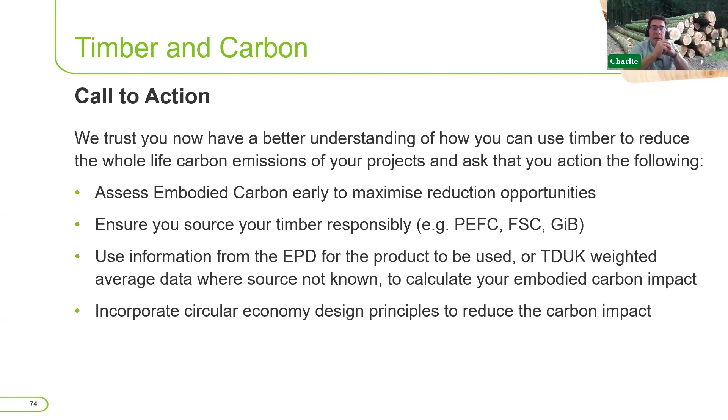Use information from the EPD for the product to be used, or if you're looking at early doors, the TDUK weighted average data to calculate your embodied carbon impacts. And then incorporate those circular economy design principles to reduce the carbon impact. So that's the key actions we want you to take away from today.

So just move over to, so Michael: it was stated that the only way carbon is released to atmosphere in construction timber is by burning. Well, we did say it was either burning or decomposing. If the timber is allowed to decompose, then the carbon will be released. Yeah, not necessarily. If the timber does decompose, it will release the carbon back into the atmosphere.

But there's been a lot of studies in Australia and America which show that actually timber in landfill doesn't actually decompose. A solid piece of timber in landfill, the atmosphere that it's in there, doesn't actually decompose that much. And actually, when they've started doing mining of landfill sites in those places now, they're pulling out almost solid pieces of timber from those landfill sites.

So there's a bit of a debate whether all that timber will actually decompose. And actually, what the data says now is if it's going to landfill, it's deemed to have gone back to atmosphere after, I believe, 100 years.

So anonymous attendee said, with faster growing tree species, does this mean that levels of CO2 will be resulting in lower levels? It depends on the density of the timber. So if the timber is lighter, so if you've got something like a eucalyptus, that will be slightly lighter in a lot of cases. So yes, there will be less embodied carbon within that piece of timber.